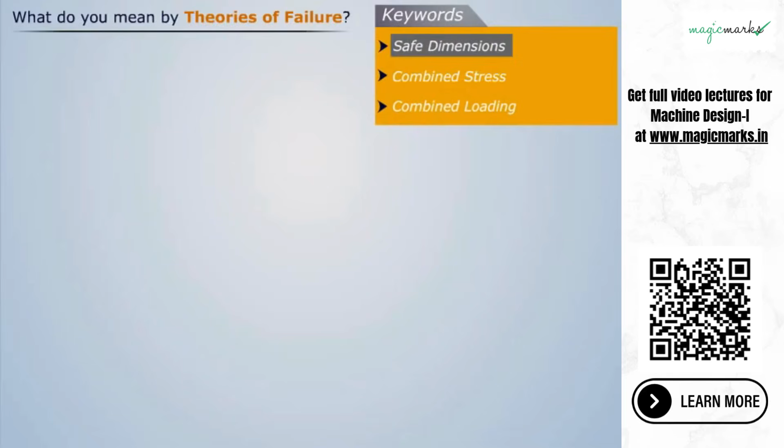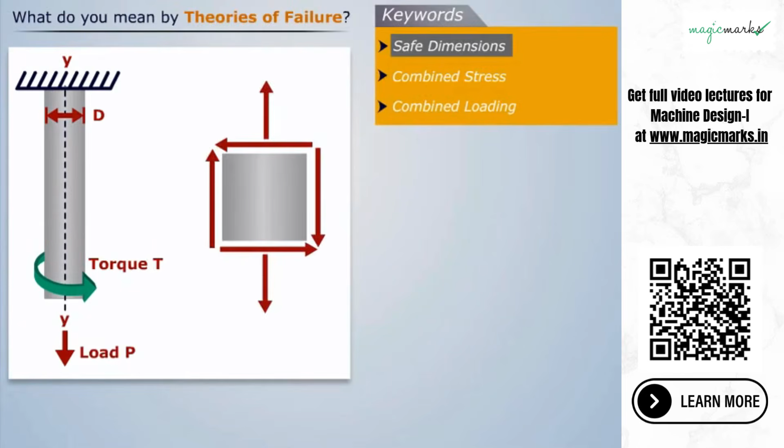To understand what the theories of failure are, let us consider a cantilever rod in a combined loading condition where torque is applied along with the axial load. Due to these loads, we see that complex stresses are induced on this rod. Because of these complex stresses, the rod may fail to perform its function either due to yielding or fracture.

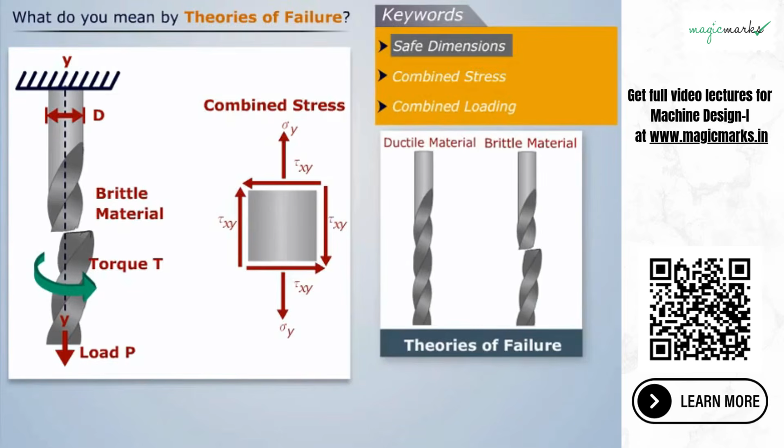So it is very important to predict the mode of failure so that the design methodology can be based on a particular failure criterion. This is possible using the theories of failure, which are basically a set of failure criteria developed for the ease of design. Thus, theories of failure are used to get the safe dimensions of a machine element when it is subjected to combined stress due to combined loading.

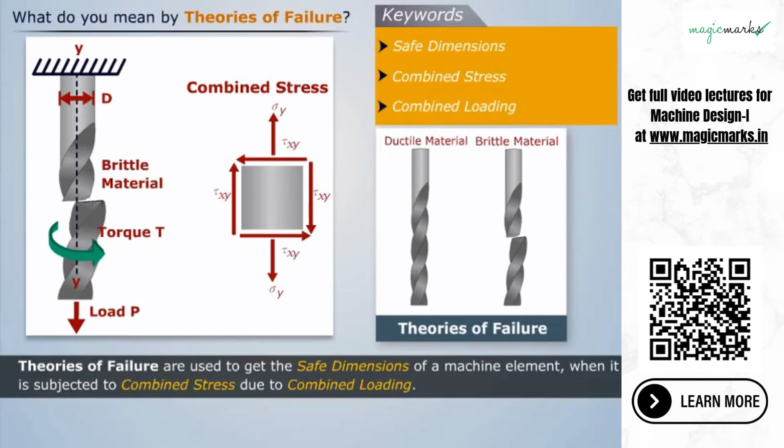There are various theories of failure. They are the maximum principal stress theory, the maximum principal strain theory, the maximum shear stress theory, the maximum distortion energy theory, and the maximum strain energy theory.

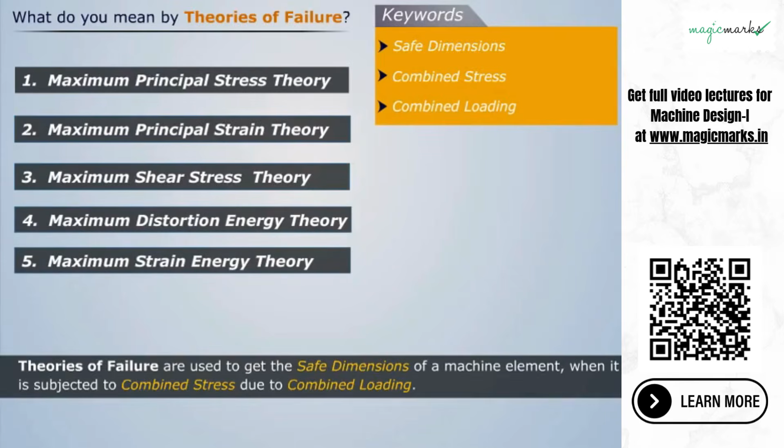Related terms are maximum principal stress theory, maximum principal strain theory, maximum shear stress theory, maximum distortion energy theory, and the maximum strain energy theory.

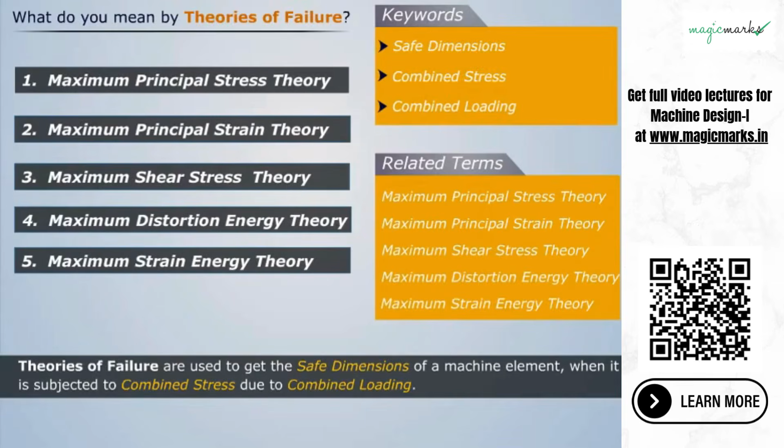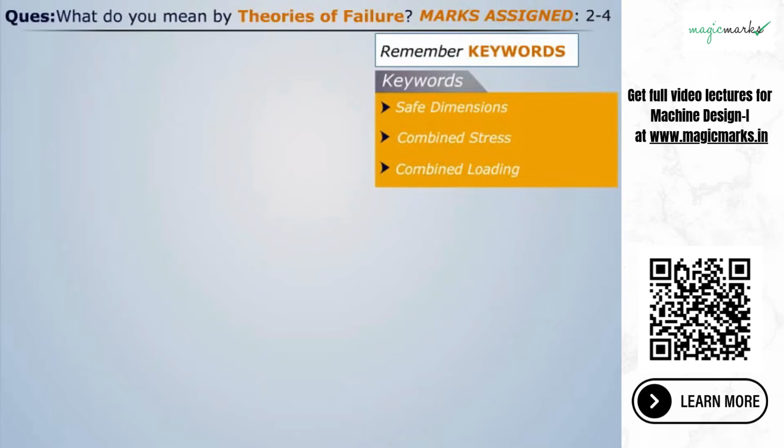Question. Remember keywords. Related terms are: remember diagram, remember definition.